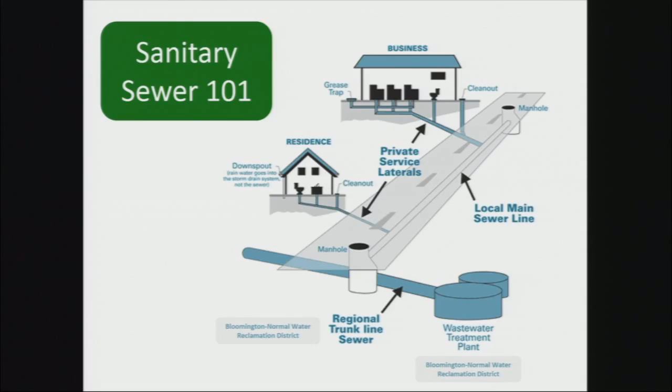So if your sewer can't make it to the water treatment plant by gravity, we have to install a pump station. This graphic shows that the initial part of the system remains the same. It leaves your house by gravity to a collector system, but instead of going to a trunk sewer, it flows to a pump station. Within the pump station, it flows to or is collected by a concrete wet well. These can be anywhere in size from 6 foot diameter to 15 foot by 15 foot square, and can go from anywhere from 10 foot deep to 20 foot deep.

So there's quite a difference in sizes of pump stations that you can get into, and the town has a number from small to large. Most of your pump stations have submersible pumps, which means they're located at the bottom of the wet well underneath the flow, and they pump flow through a force main to a high point in your collection system, and from that point it's allowed to drain by gravity to the wastewater plant.

The force main is another pipe. It operates under pressure, similar to a water main, but for sewage, and it ranges in size anywhere from 8 inch up to 24 inch, and is typically made of ductile iron or PVC.

So what happens if a pump station fails? Well, it can force water to back up into the lower parts of the system, which ultimately is typically a basement, something that we really want to avoid.

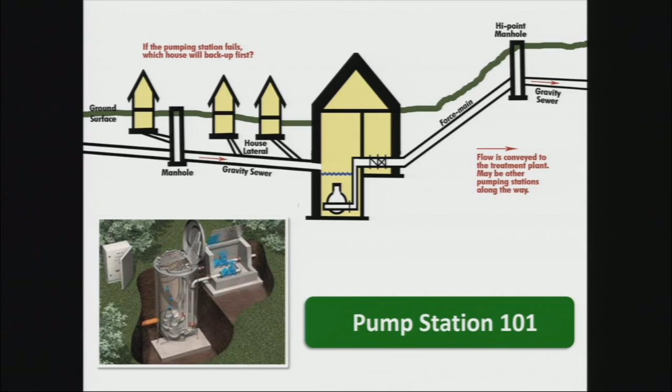So there's a lot of redundancies built into these pump stations. Most of you know that our pump stations are located north in Normal, Ironwood area, past the interstate, and then in the northeast area of Normal.

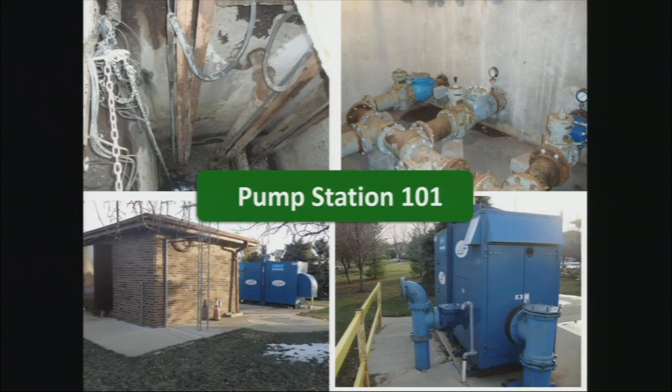So here are some pictures of the Ironwood pump station to illustrate the redundancies that are within these stations. It also brings to light the amount of equipment that is located within them. You'll see the upper left-hand picture is actually within the wet well.

There are 3 pumps way at the bottom in there, and under normal operation, a single pump operates at a time, and they rotate. Each time they alternate between when they're needed. What that does is not only give you extra capacity under high flow, but it allows you a redundant pump if one were to fail.

In the upper right-hand picture is the connection of that piping from the pumps to the force main. It allows you to isolate each pump if you need to repair it or replace it without taking the entire station down. The lower pictures are actually of a completely separate redundant pumping system, which is an engine-driven pump that sits next to the station.

And it's there in case all of the systems at the station fail. They have used it in the past. It does operate, but it is an extra level of protection that not all communities provide on some of their stations. And there's also a backup generator that provides power for the stations when they're down.

And then I think the final level of protection is the two trailer-mounted backup pumps that the town owns and maintains, that they can take to either station if they had a failure of some of the smaller stations. But again, these are investments by the council prior to the last 10 years to provide these redundancies.

And also, we have warning systems at the pump station, so we know when something fails. We get a call on that, as well as our sewer division checking out every pump station once a day. So we're out there every day. These are very critical systems, so we're on the watch all the time.

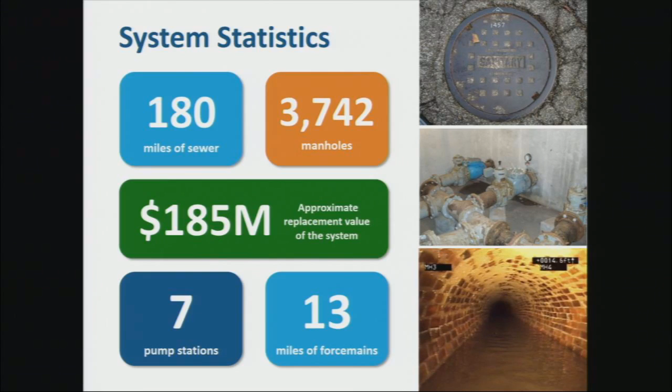A system of this size faces numerous challenges. In our previous presentation, we talked about root intrusion, I&I, and even materials of construction. But the biggest challenge is system age, because as the system ages, those problems worsen.

And this reinforces the need for rehabilitation and inspection on this area, because these are some of your largest sewers, because most of your trunk sewers flow through this area. So your 60-inch pipes, the ones with the highest consequence of failures, come through this area and are your oldest infrastructure out there.

So the initial step of the planning process was really to form an assessment of the system, to try to develop a baseline of where you're at now so that you know where you need to go into the future. And in an effort to control costs on the planning side of this, we really looked at a sample of the system.

The town had already divided the system up into 16 different sewersheds. What we did was take a representative sample of each of those sewersheds and review the infrastructure within that to develop an overall rating for each sewer shed. And what this does into the future is allow you to prioritize where you start with your funding and your inspections moving forward.

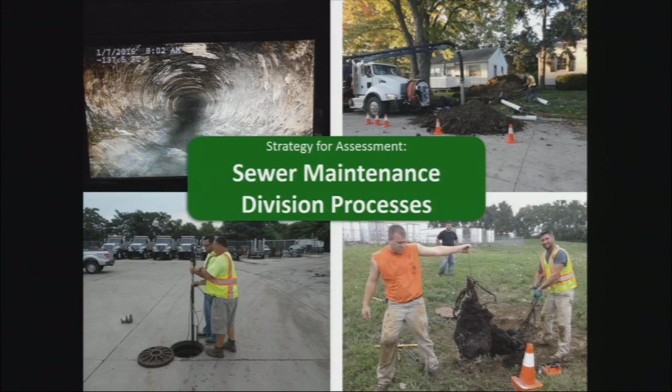Part of the assessment also was to hold workshops with the sewer maintenance division to build a better understanding of the existing equipment they have and the existing processes they use to maintain and inspect the system, to see if we can help them do it better and more efficiently through this process.

Some pictures too. Upper left-hand corner, that's the airport road sanitary sewer before we fixed it. It was a concrete sewer, in bad shape, with hydrogen sulfide gas corroding it. We actually performed improvements to that last year and lined that pipe, which was critical.

Bottom left is our sewer crew with a pole camera. They've got a camera on the end of that pole looking into the manhole, taking pictures and documenting the condition of the manhole. The other picture, bottom right, is funny because it's a big huge root they're pulling out of a manhole. That's one of our biggest issues: root intrusion.

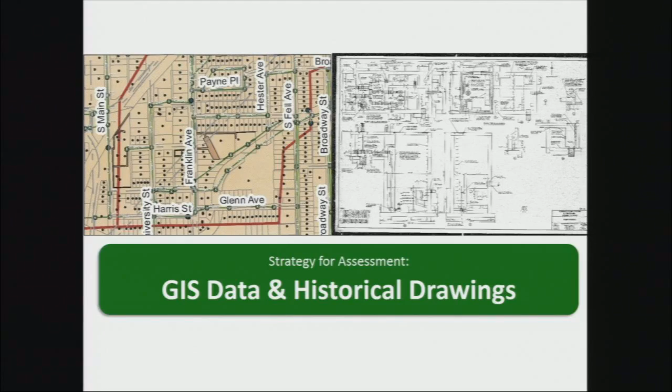We also assessed and met with the IT department to review the GIS system along with historic drawings being stored within that system. This is critical because your GIS system moving forward is going to be the main house for all of your inspection data. It's also the main piece you use to sort this data so you don't have to look at the full 180 miles of sewer. You can boil that down and focus on the critical aspects first and work out from there.

We also reviewed sewer inspection videos for that representative section. We did this to identify problem areas and create the overall risk factor. We kind of wanted to show you what we saw when it came to failures.

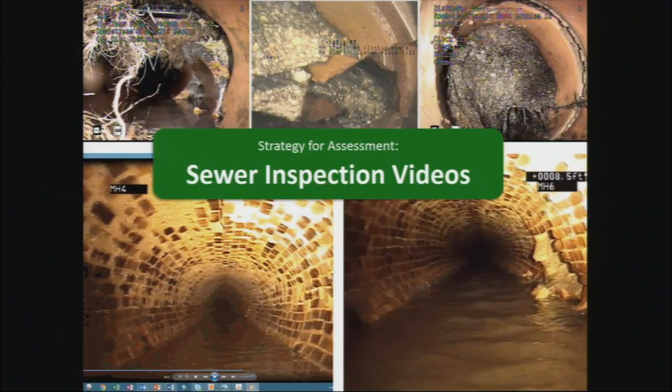Typically, even when you do a point repair, you'll line that main after, because even outside of that repair section you've disturbed the soils there and you can see settlement in the years out.

The last part of the assessment was to visit all of the pump stations with the staff. We were able to review their inspection process and daily routines, along with picking their brains about their concerns on replacement or failures they've experienced and problems with these stations in the past.

Just point out a couple things—upper left-hand corner, that's Airport Road pump station. That tank is full of a proprietary chemical called bioxide, and that's what we treat that sewer with, because we've had an issue with hydrogen sulfide smells for residents down the line. That's the best treatment we've found yet for getting rid of that sewer smell issue.

This assessment really helped us form the backbone of our plan and approach moving forward. It focused on collector and trunk sewers, manholes, pump stations, force mains, inflow and infiltration, septic systems, and personnel and equipment.

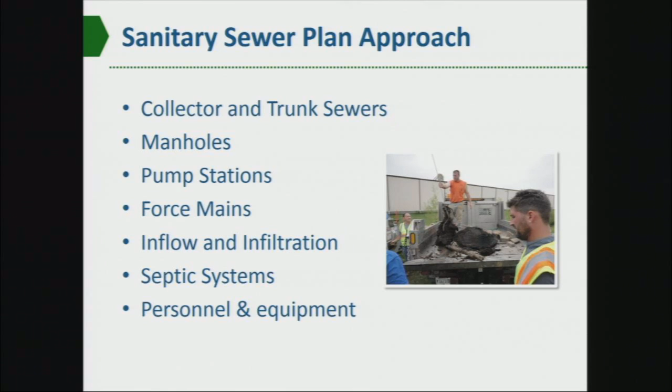To dig in a little more on each one, we'll look at collector and trunk sewers. The primary goal on these is to line them prior to failure, identify the defect before you have a failure, and deal with the consequences of failure, whether that's backups into basements or damage to other infrastructure in the area.

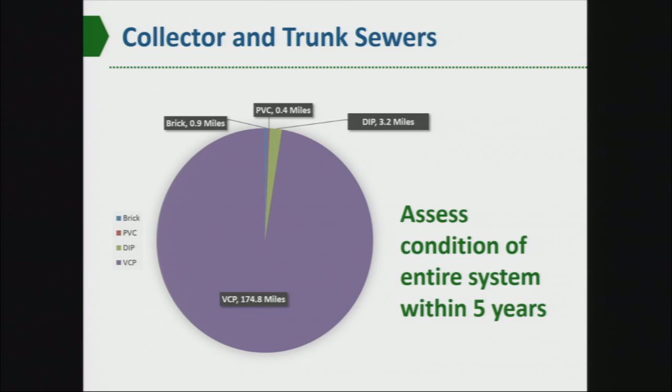The initial part of the plan has identified lining for areas already known to have problems, but a big portion is to assess the rest of the system within a 5-year period.

We think this is critical because when you look at the majority of your system, it's made up of clay pipe. Clay pipe is great for corrosion resistance—concrete's bad, which is what you've seen on Airport Road, so that's a good thing. But it's very susceptible to poor installation practices, groundwater movement, or even root infiltration or intrusion into it.

Your existing inspection equipment can get into 16-inch and smaller pipe. As soon as they get to be 18-inch or larger, they need to have a contractor come in and perform those inspections.

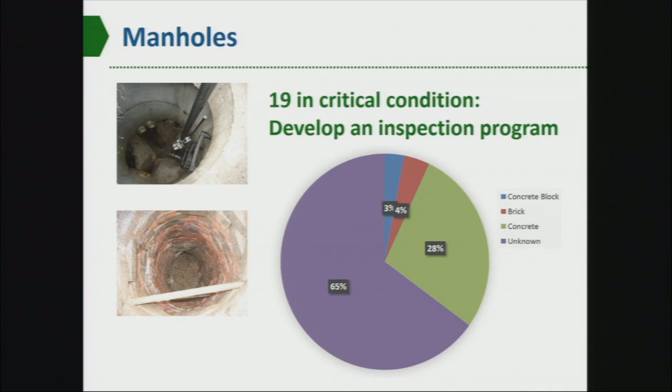To illustrate this, you've got only 3% that is concrete block, 4% is brick, and 28% is concrete, which is good—that's the preferable kind. But you've got 65% that we don't know; they've never been inspected or documented for material. So the full need on the manhole side is yet to be determined.

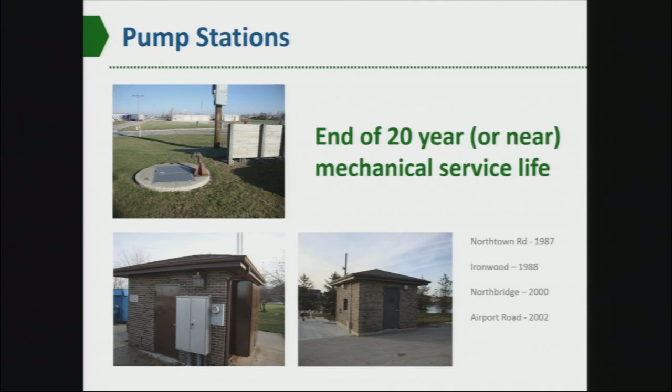Then the pump stations—you've got 4 main pump stations: Northtown Road, Ironwood, Northbridge, and Airport Road. Three of your biggest, Ironwood, Northbridge, and Airport Road, are nearing the end of their 20-year mechanical service life. That means pumps and electrical equipment are going to see failures and be in need of replacement, preferably before they fail.

We've planned for those replacements in the 10-year period, and you've already started this on the Ironwood pump station, where you've replaced a couple of pumps and some controls in that station.

Force mains, you've got 13 miles of force main. Unfortunately, 99% of them are ductile iron, and you've experienced corroding of the ductile iron pipe due to aggressive soils and the sewage strength.

These are not easily assessed currently for structural stability, but the technology is improving, and we expect the cost to perform this assessment to come down in the outer years of your program. It may be something that you're able to do to better identify what areas need to be replaced.

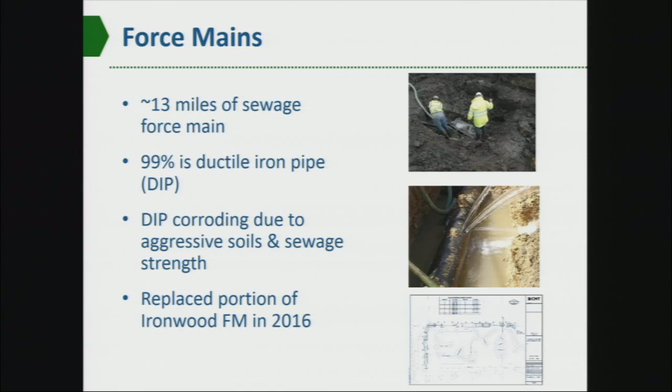Proactively or reactively, you replaced a portion of the Ironwood force main in 2016, which was a project of great need. You might recall in Ironwood we were under a consent agreement, which is a pretty friendly form of encouragement from the EPA to replace the sewers. We were under agreement to get that done by February of 2017, and we did achieve that. The Ironwood force main system, the sections that were bad were replaced in conformance with that agreement. So that's a new force main up there.

The last part of the program is the understanding that this is a process. You're going to continually assess this system moving forward and monitor the defects and repairs you make to ensure you're achieving the level of service you're shooting for. This will include collector and trunk sewer cleaning and televising, preferably with your own staff, manhole inspections and ratings, and hopefully the force main condition monitoring can come down in cost and be something you can plug into the later years of your program.

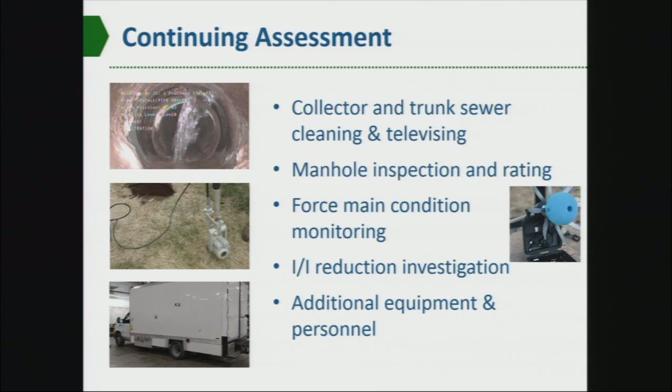Once you've addressed your structural concerns within your systems, you can switch focus to reducing inflow and infiltration into the system. This will preserve your capacity for future developments and future needs of the system. Ultimately, you'll have to determine and monitor whether additional equipment or personnel needs are necessary as the system ages and grows.

Looking at the proposed plan that the Sanitary Sewer Master Plan identifies in the initial five years, the capital improvement or investment plan is to clean and televise the overall system and assess conditions. This will establish a risk rating, which involves an age factor, a size factor, and the inspection code or score. It combines these three and helps the town and staff better identify those areas most in need of funds for replacement or rehab at this time.

What that does is allow you to get the most bang out of the money you're trying to spend, versus being reactive to only responding to failures as they occur.

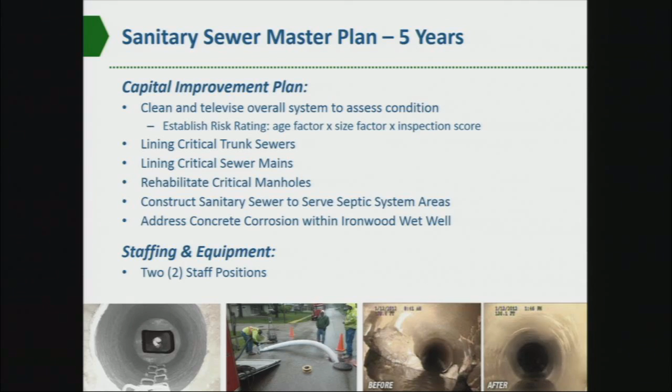And then finally, we did propose in the plan two staffing positions, and that's included in the proposed rate study as well. One position we envision as being more purely engineering, on the plan development side of developing plans for these improvements. And then another position on the operations side, more on the maintenance, scheduling, and inspection side of the sanitary sewer program.

So in the post 5-year, the capital improvement plan is a little more flexible. The reason we've left it that way is your assessment in the initial 5 years is going to fill in the gaps that we don't have on trunk sewers, manholes, and some of your other collection system. Through that, we anticipate identifying other critical need projects that will float to the top in these areas, and we'll be able to know that and sort those through the efforts you've done with your GIS system.

And we'll plan to rehabilitate manholes, replace aging pump equipment, and rehabilitate critical force mains as they come up, whether it be by leaks or breaks that you experience.

Inflow and infiltration. Once you've addressed the structural issues, as I mentioned, you can switch your focus to identifying and trying to eliminate infiltration. This is important because, number one, it preserves capacity. Number two, it lowers your overall operating costs. You're not having to pump those, you're not forcing BNWRD to treat those flows, which keeps your overall costs down for your citizens.

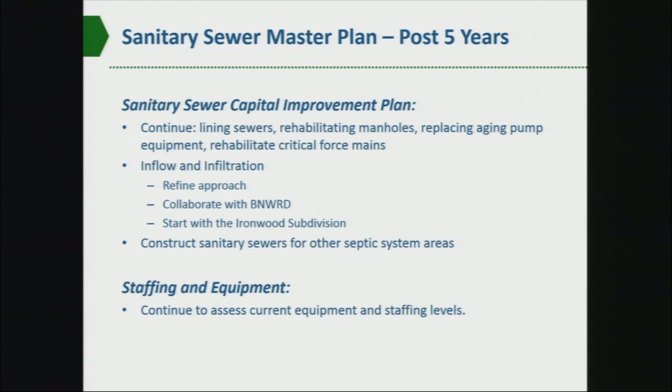And then ultimately working with BNWRD. They have a lot of flow monitoring data for their system and have offered to perform some flow monitoring for the town as things progress.

And continue to construct sanitary sewers for other septic system areas. And then monitor your overall staffing levels and equipment to determine, as the system ages and you know more about the system, that you have the appropriate level of staffing to continue to be able to clean and maintain it.

So this one I'm pretty proud of, because it reflects what our sewer division's been doing: televising sewers. Prior to 2016, when we did this plan, they'd go along and hit critical areas as they thought they'd occur, or problem areas, and we were averaging about 6 miles a year, which is good. But when this plan came forward, we really challenged our sewer division to get more sewer miles televised and rated. They were hesitant at first but really took on the challenge well. So in 2016, they did about 19.7 miles of sewer, not just doing the things they have to respond to, but also doing this sewer rating.

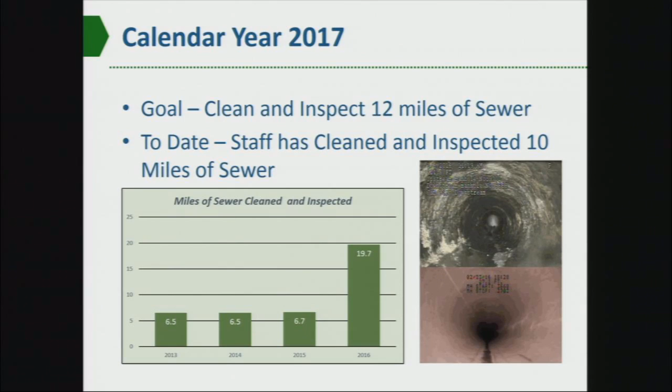To highlight that certification Wayne mentioned — it's critical to have your guys trained in that, because it won't be the same person or even the same contractor inspecting each section of sewer main. What we need is an apples to apples comparison of what each main looks like. Now that they've had this certification, we're comfortable that when one inspector gives us a rating for a pipe, it's comparable to another inspector's rating, and this certification allows you to do that.

Along with this rating system, we've had a sewer rating software package, but the council approved a newer upgrade called the Granite Inspection Software. This is loaded on the TV trucks and provides all the rating software right in front of the operators, so they can rate the sewer, televise it, make necessary notes, and that automatically updates into the GIS system. That was a big critical step for us, and it'll help with our contractors as they come on board — that's the full implementation of GIS.

Once this work is done, we can look at our computers, pull up that map to the left, and click on a manhole or a sewer line to see all the information available, including ratings, pictures, plans, and things like that. Very proud of getting this software online and getting the GIS working like that.

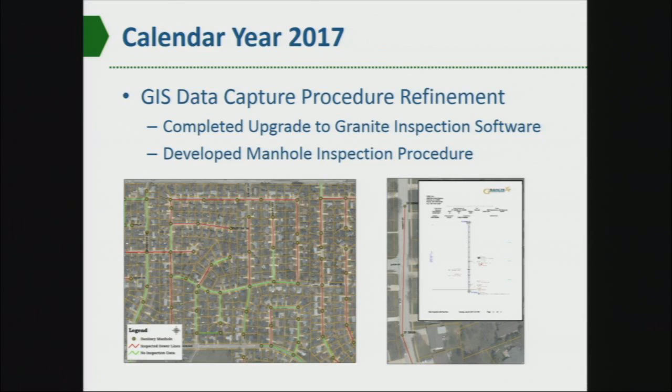Getting into the rate increases, but first, any technical questions about the physical sewer system? You can ask any time.

This is a slide we decided to show comparing existing sewer rates in other communities. There are differences here, so it's not entirely apples to apples, but these other communities have a system similar in the sense that they operate the collection system, and there's a sanitary sewer district that does the treatment. So we split that out — treatment costs versus collection costs.

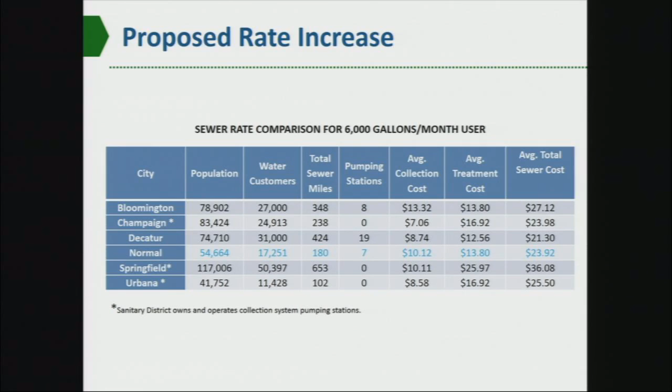Scott's worked with several of these communities and has specific information, but we probably don't want to get into some of that. What we can say is that all of these communities have sanitary sewer work to do, and they know it. Many have completed sanitary sewer plans and rate studies. Some are being progressive about it, even if they haven't taken some of these steps yet. Some are in trouble, under consent decrees and other issues from the EPA, so they'll have to deal with their issues through increased fees, debt, or whatever else. Others may not be dealing with the issues — that's another option some communities take. But they all have sanitary sewer issues, and if you talk to any public works director, we all have the same issues with sanitary sewers. So it's an across the board kind of issue.

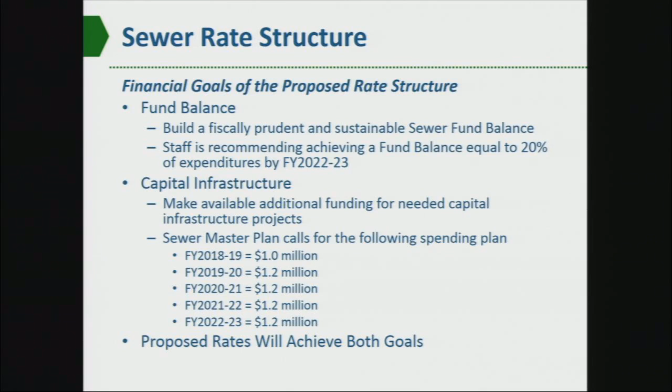I think anyone that looks at that presentation and has read through that project report can certainly see there's going to be additional cost associated with addressing this issue. We worked with Scott and Wayne and his group to develop a rate structure that would essentially overlay the capital and operating needs of the system for the next 5 to 6 years. This is a model we've used in the past with water very successfully back in '09, and we essentially use the same process this year.

Really, we have two overarching goals in this process for a rate structure. One, we want to get the fund balance in the sewer fund to a reasonable, financially prudent level. Right now, the council is well aware that for several years it has not been anywhere near that. It's not bankrupt, but it is certainly struggling significantly.

In terms of capital, we want to make sure we can fund the system capital needs appropriately. The system analysis that's been done, the system review that will be occurring in the next 5 or 6 years, again, is going to cost significant money, about $1 million next fiscal year, and about $1.2 million every year after that.

So our two goals are, one, bring the fund balance to a reasonable level. We're doing that by easing into it with this rate structure over 5 years, so we're not getting there overnight or even in 1, 2, or 3 years. Our goal is at year 5 to bring the fund balance to 20%, which is frankly a little bit below industry standard for sewer funds and utility funds.

However, we didn't want to stress the rates too much to get there. And we want to make sure that we have enough money set aside for the capital needs that are being prescribed in this rate study and going forward. So we feel that the rate structure that we're going to propose tonight, which you see in your report, will achieve those two goals. If you go to the next slide, this will give you a little bit of perspective.

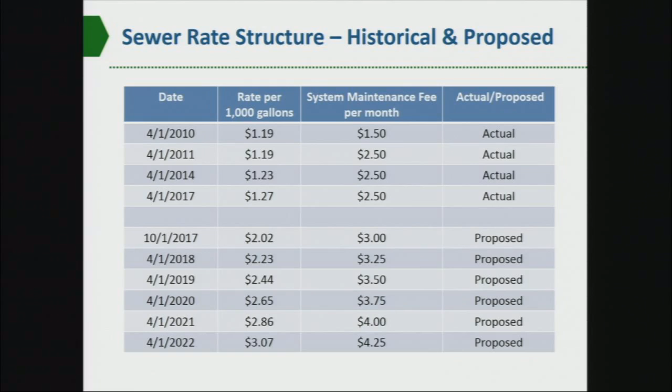So again, not the place we want to be. The council is well aware of that, they know this has been talked about and this is coming. As staff, we feel this is the best approach, a fairly sizable increase in year 1, relative to other rates, to essentially prime the revenue coming in, and then develop more of a maintenance increase in the out years.

In terms of the impact to our residents, the next slide shows what a typical utility bill looks like from the town. You can see there are 5 components to it. We're only addressing right now the sewer usage component. We're not increasing water rates; BNWRD, we don't control that, that's a separate governing body. We're not changing what citizens pay for garbage, recycling, bulk waste, or stormwater.

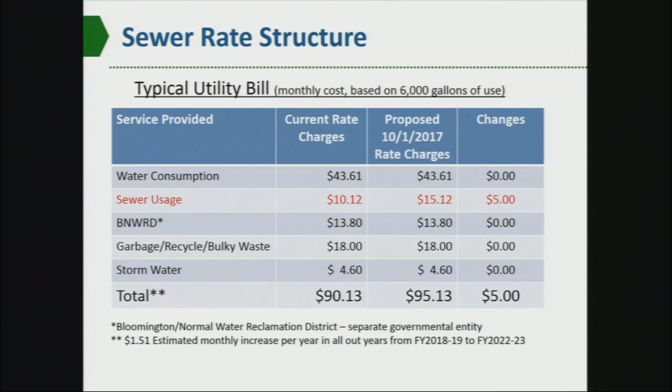So you can see by the slide there, the sewer usage is going from $10.12 a month to $15.12 a month, so a $5 increase on a typical user of 6,000 gallons of water and sewer usage per month. In terms of going out, that $5 turns into $1.51 in the out years for the same typical user and what they would be charged. So next year, the rate increase, presuming it's approved, would be $1.51 more in cost, and so on for each fiscal year.

And I think that's the end of our presentation, but I'd like to say this is, from our aspect, a very proactive approach to taking care of our sanitary sewer system. The IEPA likes us. We report anything that's out of the ordinary with them, and they've always said they appreciated the work we do. So we're in good situation with them. But there are some things that are scary out there for us.

Mr. Fritzen, if I could make a few concluding comments, I like the word proactive that's been said throughout the evening, and that's really Normal's history when it comes to infrastructure. It predates me, but we have always been proactive in maintaining and investing in infrastructure, knowing how critically important it is to everything we do as a community, quality of life, economic development and so forth.

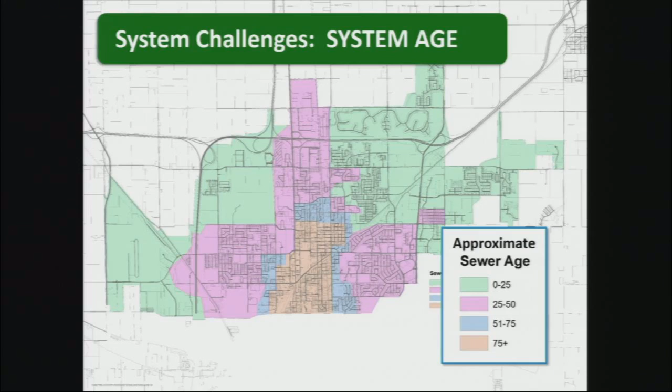Right. So I kind of was answering my own question last night as I was studying this, thinking, well, it's kind of the coming of age - you built a bunch of homes up there, 583 to be exact, in Ironwood alone, and now it's 30 years old, so that's part of the why now. And that's an important point to make about pump stations - 30 years old, you better be looking at them. Hopefully you've been maintaining them, but pump stations need constant surveillance as far as maintenance, and that's the situation we're in north of the interstate in the northeast with pump stations.

The other kind of thing, and I think you may have asked this before, Ms. Lorenz, is about what's the worst thing that could happen. Pump stations are certainly something to pay attention to, but the other is trunk sewer systems. These systems provide service for a lot of folks out there. They're buried sometimes in inconvenient areas to get to, close to buildings, things like that. So those are probably some of our first priorities - to get a very good handle on the trunk sewer systems and get those repaired as necessary.

Okay, thank you. Ms. Lorenz, just if I could, respond to your question, why now? I think we've gotten more sophisticated. I think Wayne is responsible for that in large part when he went down to Public Works.